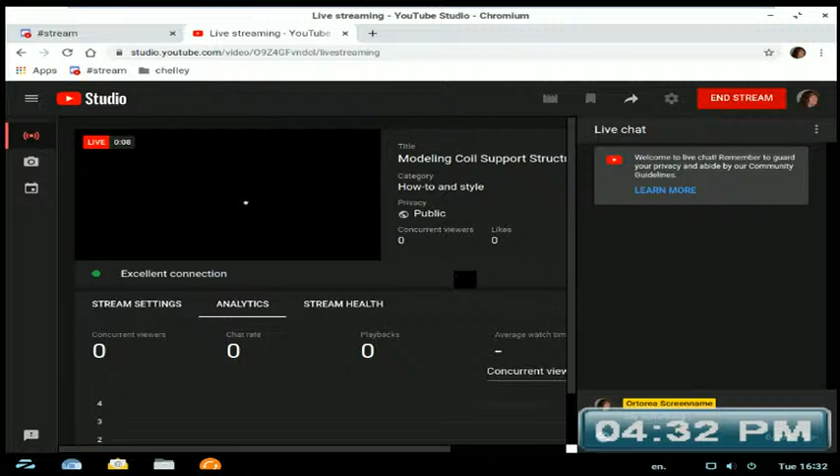Right, back again. I think I'll pause the virtual machine as soon as I've got verification that it's running. Looks like it. Right. Just need to get it started on this.

So, what am I doing today? Right, well, obviously because of the new three-legged design.

Oh, that sounds funny. I don't know, I keep on unintentionally using puns. Yeah. I don't know why, I just do it.

Right, because of the new three-legged design, I have to adjust my coil support, so I'm kind of using the previous title for the same thing, because what I need to do is make a new coil support that's actually wider. So the best way to do that, I suppose, is to start from scratch, really. So what I'm going to do is I just want to create a disc first of all. I'll show you what I mean.

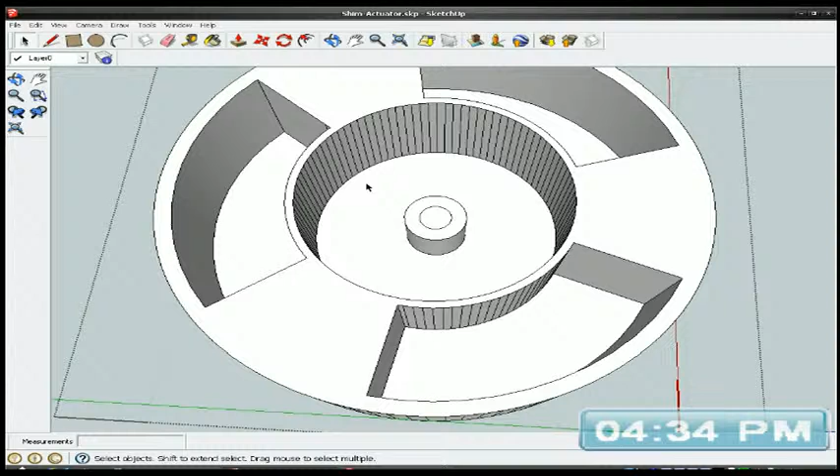The easiest way to do it is to go to my drum. I've still got the hole bunged up in it. Oh dear, I'm doing it again. Right, so I need to close this. Oh god, I'm not going to say anything. I keep putting my foot in it. Right, so we'll just seal that up. Right, I'm avoiding the pun. So that I can get my centre, because this is the easiest way of doing it, really. Just to model around this drum, and then I'll show you in a minute anyway.

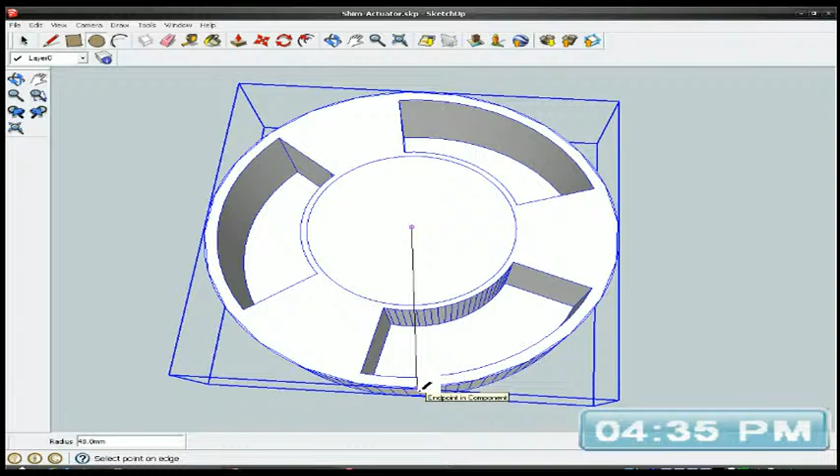Right, I've closed the group so that I'm not going to mess with that. I need a new disc. I want the centre. Oh, there we go. I've got my centre. So I'm going to make a new disc. I want to check the diameter, which is 48.8 millimeters, and I want a 2mm gap actually. So 48.8, so I'm going to go up to 50.8. Because I want a bit more room, because I'll leave it on that edge and I'll take 50.8. Right, so I've got a disc all the way around that.

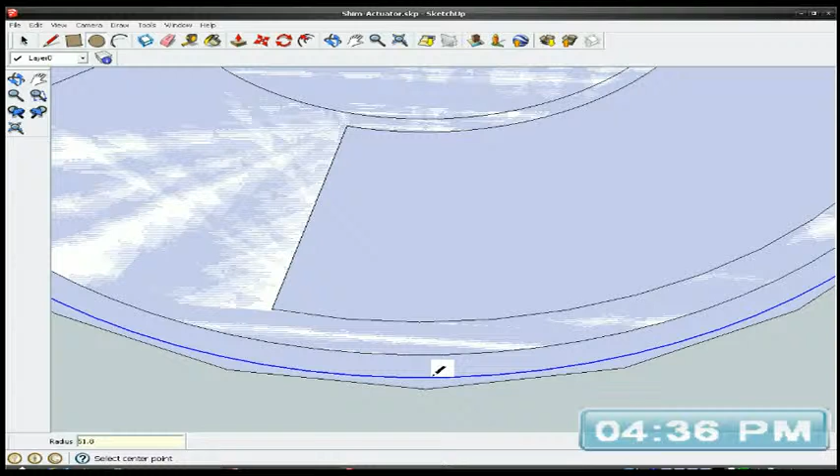Now I've got to stall these edges and smooth them out, because they've stepped pretty coarse, so I'm going to just divide that by 100. Right. And I also need another disc around the disc, because I need a wall going down, I'll show you what I mean in a minute. So what I'm going to do now is go back to the centre again. Going to go out, so that's now 50.8, and I want a wall thickness of 1 millimeter, so 51.8 should do it. Let's just go to 51.8. Right, now I need to smooth that edge out. Divide by 100.

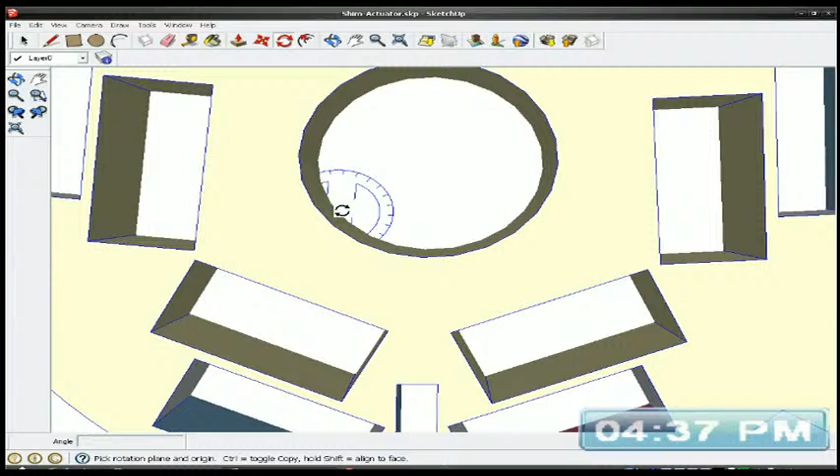Now I have to put a division in this. So actually, is this showing up in the other models? No, it's not, because it's not inside the component. So no worries. I need to go across here and I need to measure between. I'm not going to say it. Oh, best thing to do is, I've got my centre on here because I sealed the drum. So I'm going to find the axis between these leg points. So if I can find the flipping middle, which is a bit tricky. Oh dear me, come on. It won't let me get the middle. I think I need to go between there. Try it this way. Oh, that's not the middle. It says centre in group, but that's not the centre.

Bugger it, I'm just going to hide this top thing. Hang on a minute. Edit group. Let's just hide that. Right, that's better. I can see what I'm doing now. Right, I want to get the middle. I think I've got it now. Got the centre in group. Can I unhide that other thing? Unhide. Can I still get the centre? Yeah, I've got my centre.

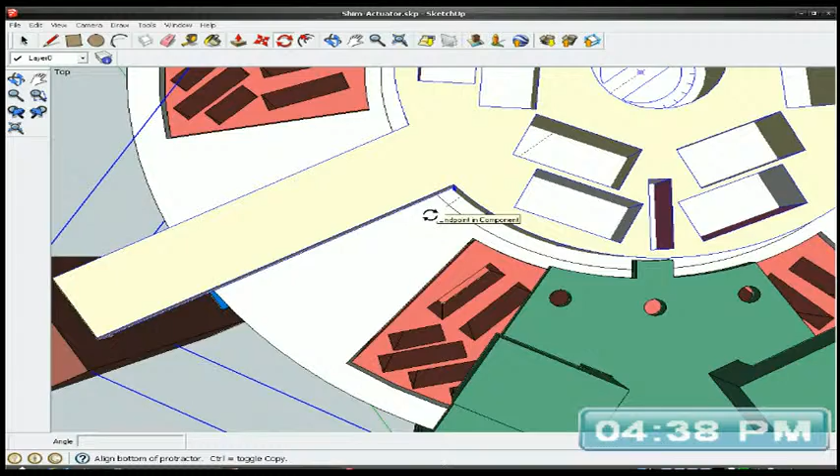So what I want to do is, when I find the axis, these legs are not perfect. So I'm going to go between the... come on. Oh, it's not telling me. It's because I'm not rotating anything, that's why. Right, so what do I need to do? I'll just have to rotate this whole drum. That's what I'm going to have to do. Edit component. Now let's try rotating that to work this out. I've lost my middle now. Lost my friggin' centre again.

Not good. And I can't hide that thing because I'm inside another group now. I'm just trying to find the...

Hang on a minute, I just realised something. What am I doing? I know what the division is. It's 120 degrees.

Hang on, 360 divided by 3. Let me just... I'm going to need to go a bit under that though. 360 divided by 3 is 120. Right, so actually I need to be less than that. So I'm just going to get out of this lot because of 120. Let's try this.

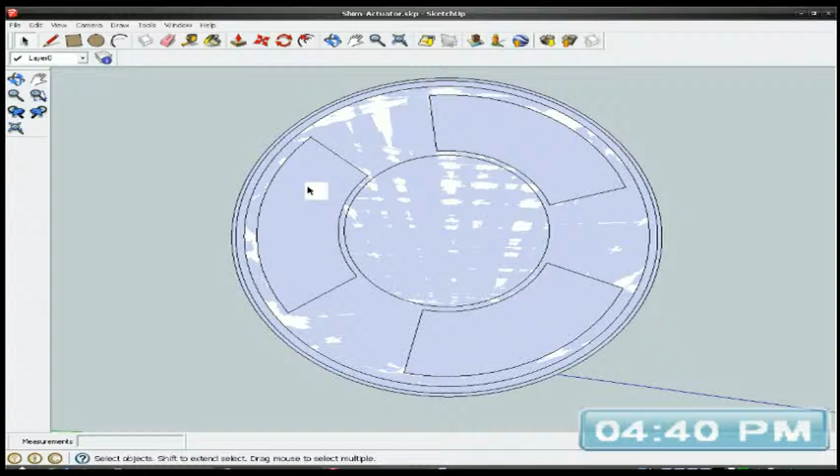Right, if I can get my ruler, find the middle of this thing. Can't. I want that.

I'm going to make a new group. I lost it again. It's like, connected. Make group. Right, I'm going to hide this other thing. Hide. Right, that's better, then I won't get in the way.

Damn it! Now I want to use the frigging loo. That was sudden. Be back in a minute.

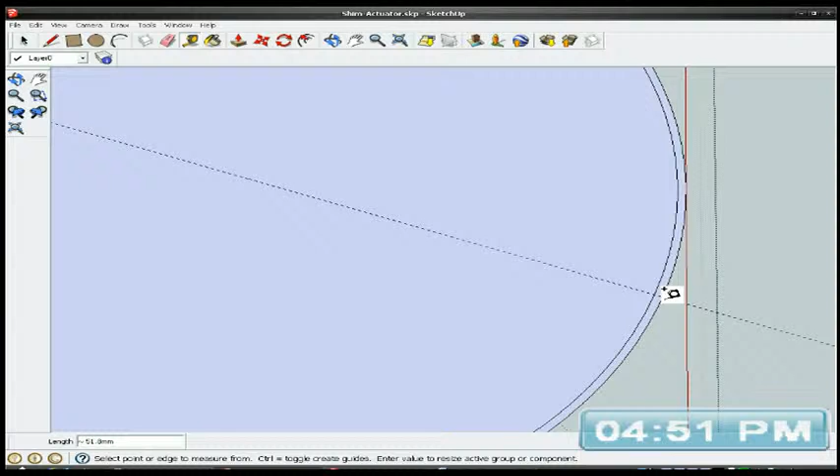I want the middle again. I want 120 degrees. So what I'm going to do is I'm going to draw—actually it'd be better if I just undo the guide and just draw a line from the middle to, I'll stay on the axis, the red axis. Go all the way down here.

Right. Copy that line. Like that one. Oops, wrong one, don't want all of it. Just that one.

Rotate tool. I want the middle, and I want to copy that line 120 degrees. Actually, I'm going to go a bit less than that, I'll show you why in a minute. 115 degrees. So plus.

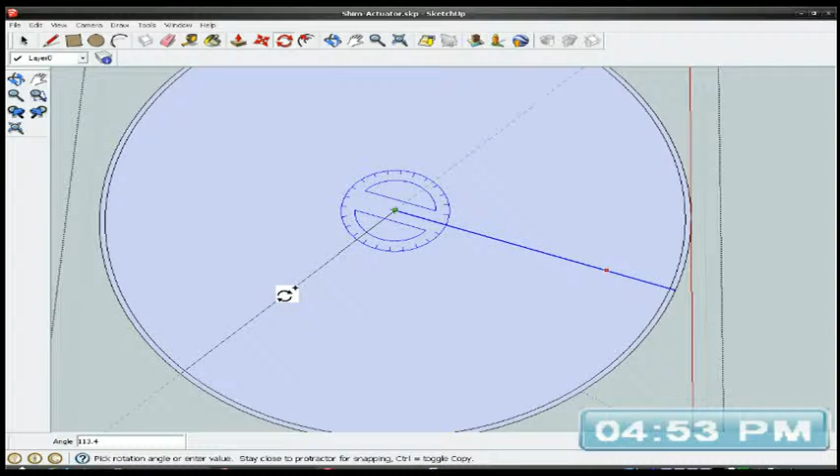I'm just going to go to... I'm going to go to 112, 112. So I've got a line like that. So it looks like a pie chart now. Right.

Alright, let's just close this out a minute because I want to get this axis right. So I just want this. I'm going to copy that. I'm going to make a component. I'll show you why in a minute. So I'm going to copy that.

Because I need to... let me just go to this other one which I haven't hidden, which is still visible, because I need to get rid of that hole a minute, which I don't need anymore, because the other one's hidden, you see. Right, I'll get rid of that as well. Right, I won't need that anymore, because I'll show you why.

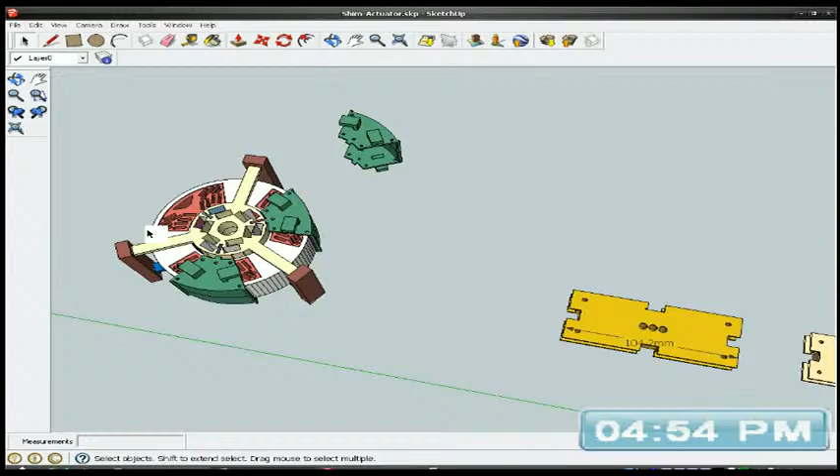I want to put it on top of here. Or better still, I want to copy that one over here, which is a lot better because I've got the thingy-jigs. I'm just going to paste the copy there. I want to—it's in a group, so I can move it around.

Just a minute, it's a bit low right now. I need to lift it up a bit. I'm just trying to get my alignment right.

Right, the other line's underneath, so I need to rotate this thing around now. This is my guide, and I've got one that's free to work on, and this one which will give me an idea.

It's a bit of a pain, but my centre should be around that axis, so I'm just going to rotate this around a bit. You can see the problem there. I didn't get enough clearance from them legs.

So the line is underneath them legs, so that means I need to move them lines. Actually, it's better if I just... right, let's just look underneath. It's because them legs are square and they're not tapered. That's the problem. Just gonna have a look underneath.

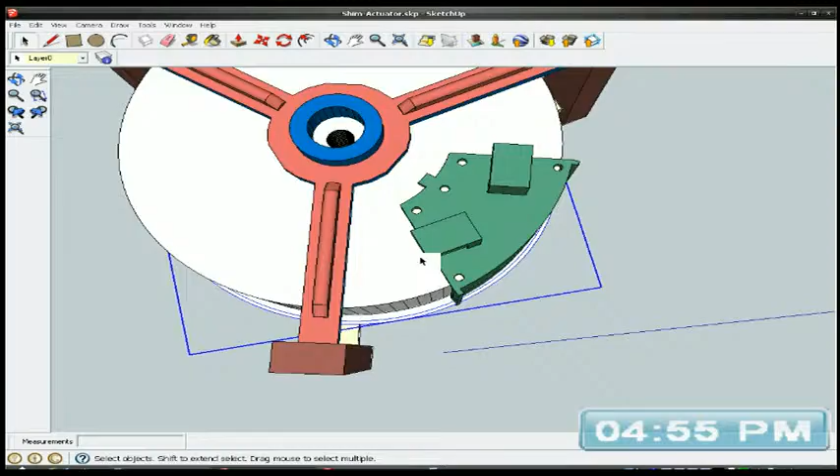See if I'm in the middle. Looks like I'm in the middle. I don't have to be bang on right now, I just want to be in the middle-ish. So really...

Right, so yeah, them lines need to be in more in the middle. So what I'm going to do, instead of messing around with this one, which is hard to get to, I'm going to measure something. I'm going to take a measurement.

Right, that line underneath this here is about right, but it wants to be back a bit. Let's have a look at this one over here. It's a bit too far underneath. I'm going to rotate that a bit more.

What the hell? Somebody's pipping the horn. What the hell is all that about? Somebody's a bit horn happy.

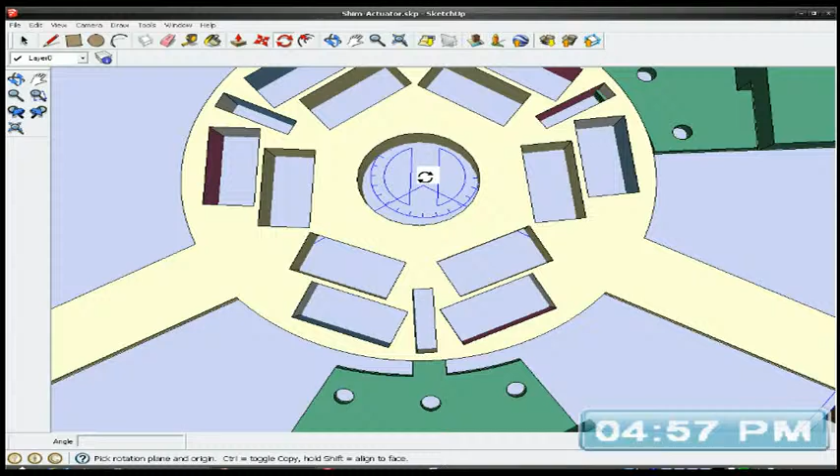Right, I need to bring that around a bit more. I'm going to go on X-ray in a minute. Let's put that up there.

Yeah, that's not far off. A bit further back. Just want to get them lines about right, the same.

What the hell? I'm going to look outside.

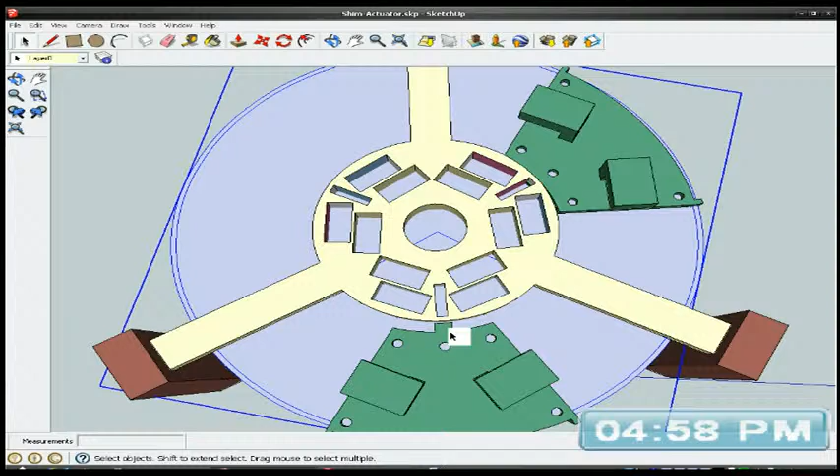Shut up, for God's sake. Someone's pipping their horn. I think some kid's got behind the wheel somewhere. For f*** sake, shut up! I hate it when people start pipping horns. Unless it's a dog.

Right, so what I need to do is bring that line in on this side. Just trying to measure it. It's a bit difficult to work out - about 2 millimeters. And on that side, I know I'm doing this in a really peculiar way, some people do it differently, I know, by about 2.4 millimeters.

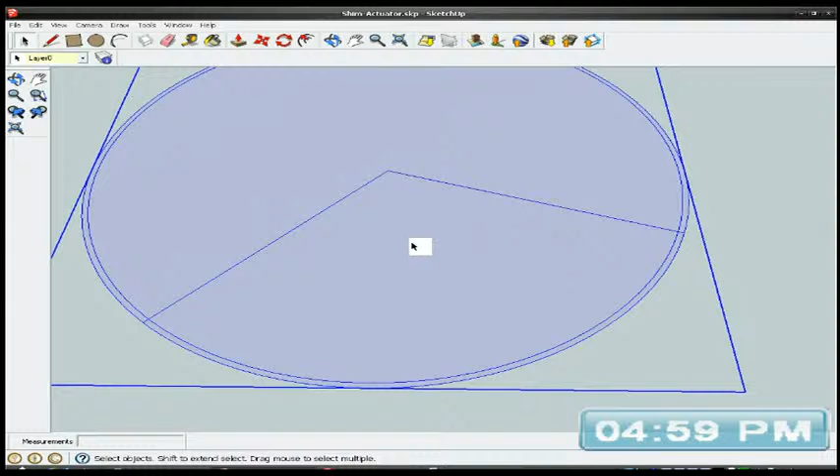Right, let's go over to the disc. Actually, I've forgotten how far from the centre I am. I need to measure the distance from the centre - about 24 millimeters, doesn't have to be exact. Right, go over here. 24. I've got a dot there now. 24.

And remember, it's 2 millimeters in. I just want the dot, I don't want the flipping line. Oh, it won't do that. Go from here - 2 millimeters. Well, it looks like I've got it - it says midpoint anyway.

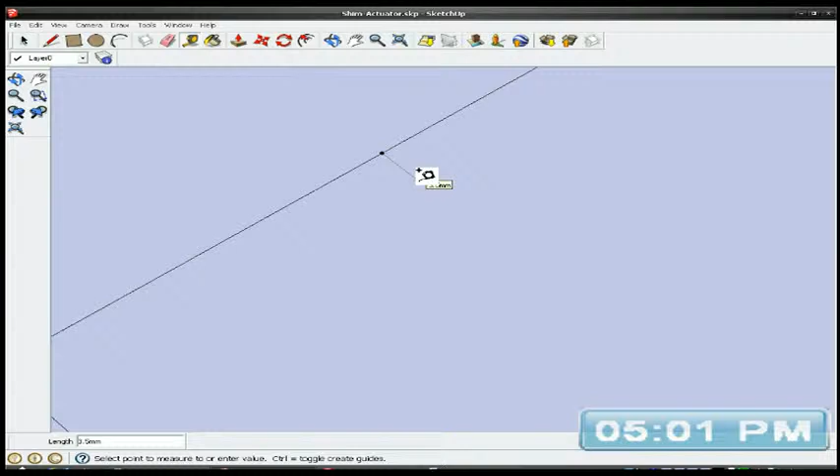I'll go over here, I want to be 2.4 millimeters from there. Oh, is it 2.6? Oh, we'll go to 2.6, a bit extra is fine. 2.6, come on, you go there. 2.6.

Because it's a component, my dots should appear over here as well. Yeah, I can see my dots, my ruler marks are here. Right, it's on that line, around that edge - right on the edge of this side of this bracket.

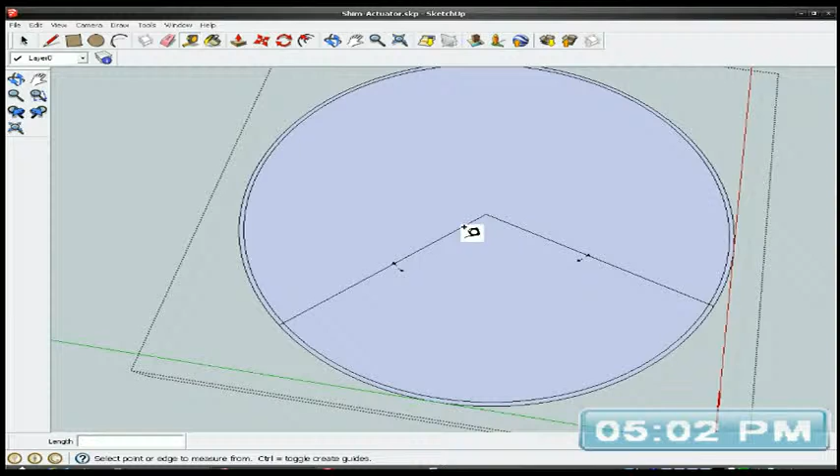This one's just a bit of a pain. So what I'm going to do now is I need to get my arc tool out because I want to cut an arc on here, so I need to measure between there and there, which is 24 millimeters, right, 24 millimeters, near enough. So, sorry if I'm making you drunk by doing all this - 24 millimeters in a straight line, just roughly.

There we are, so now I need to put an arc between there and that point and take the arc up to that dot. There we go, I've got an arc. Now this is going to form the inside of my coil former thingy-majiggy.

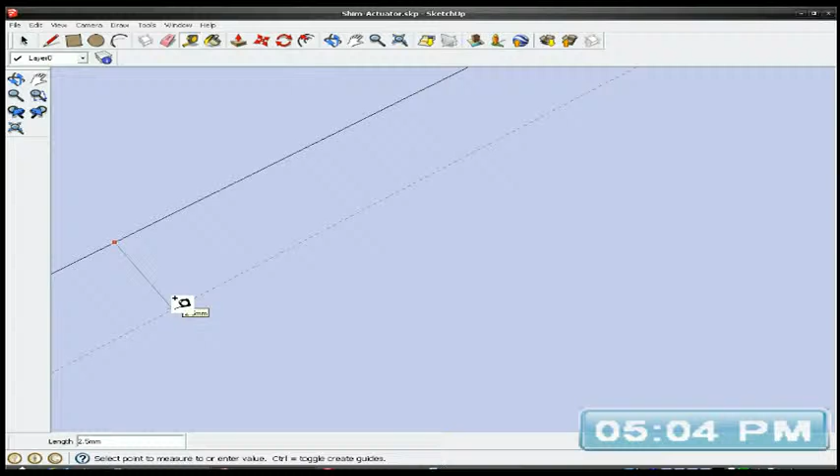I want to be 2.6 millimeters from over here, but I can't seem to get a line to a dot. Oh, there we go, I've got it now. Right, 2.6. What the hell? Come on. Jump in between 2.7 and 2.6. Right there. There, 2.6 there.

Oh, I forgot where this is done. So I'm going to draw a line between there, that dot. Oh shit, I forgot how far. Hang on, escape a minute. Oh, actually I can go right to the edge, yeah, that's right. So, a line between there and there - a line between there. This is probably going to make it wrong, so I'm just going to undo it if I need to.

Right, let's have a look at this little one over here. Yeah, yeah, there's a problem. I'm going to rotate that a bit. I am going to - what the hell? Oh, I know what I've done wrong. Oops, I just realised what I've done wrong.

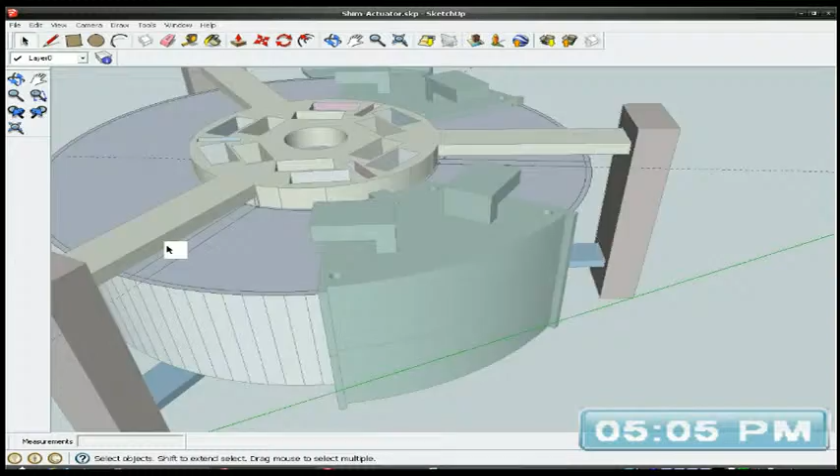Right. Oh, undo that, undo that. I'm not thinking today, my brain's not working. I want to go to that section like that, from that dot to there. Now that should look right now.

Come have a look over here. Huh? What? No? Oh, it's not far off, it's just a bit off. I should be in between - I need to be in between them lines. I'm terrible at flipping - I'm not very good when it comes to angles, that's my biggest problem.

Right, I know what I need to do. I want the midpoint, so undo. I want to be between there and the midpoint over here. That's there. Oh, this one doesn't have a midpoint.

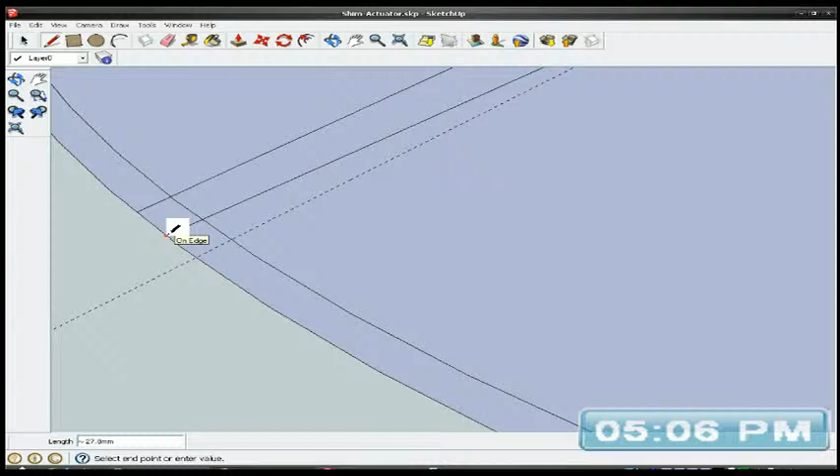Oh, it's wrong, oh, I'll go about there. Right, have a look. Come on, not far off. I'm gonna try and move that line a bit. What about the other side? Yeah, that one's moving a bit more.

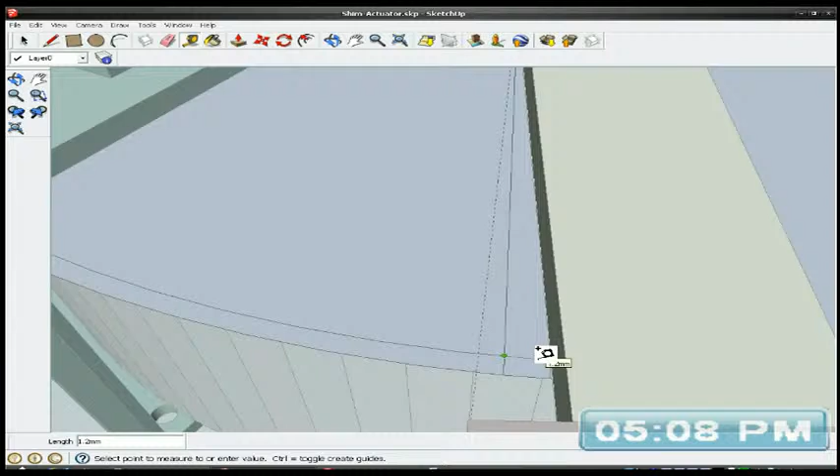I want to be in by 1.7 millimeters. Well, actually, 1.2 millimeters if you're further in. Oh, well, I want to be right there. It was in betweeny, I think this one wants to be - I'm going to guess that it's about there. Right, I'm just going to delete that other line.

I'm not all with it today, you know, I really aren't. I've just had a strange kind of day.

Do I need to be right to the edge? Probably. I'm just going to go directly across here because I don't want that other line to go that way.

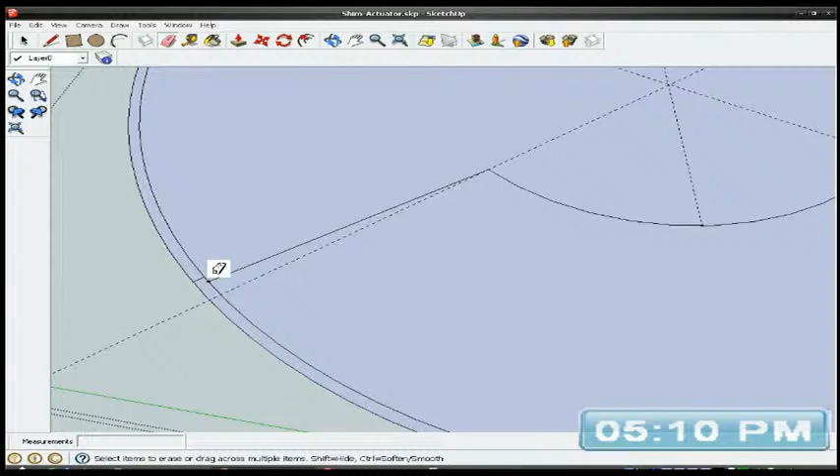I want to go straight across. Come on, stop it, damn thing, it keeps jumping to the axis line. I don't want to be over there, I want to be over here. Stop it. You hate it when things won't go where you want them to go. Right, got it.

Yeah, that's about right. Same on both sides. Get rid of that line. Once you've got the top one done, that's great because I can copy it, duplicate it. I'm going to delete all my guidelines. Delete guides.

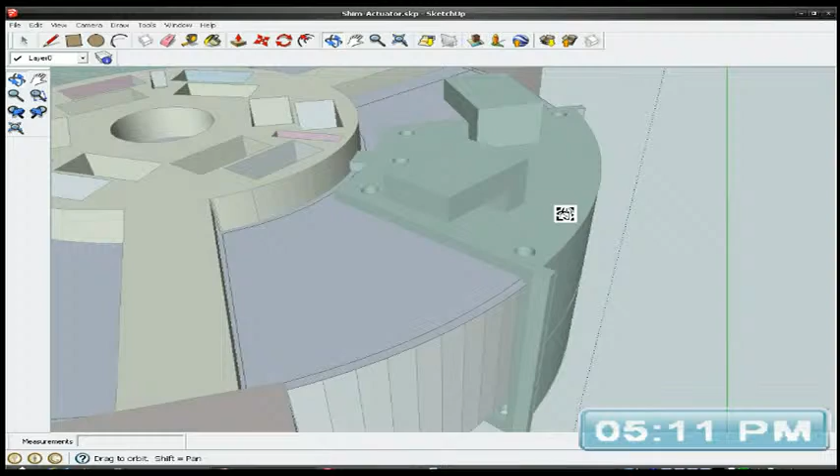Let's have a look over here. Yeah, that's not bad. Yeah, that's good enough for what I want.

I haven't got clearance on the arc very much, so I'm just going to redo the arc line a bit. That arc wants to be starting about here to there. Come back a bit more.

Get rid of that one. This is just a shelf really, I'm not fussy about it. It doesn't have to be precision, that's why I'm just doing it this way. Yeah, it looks better.

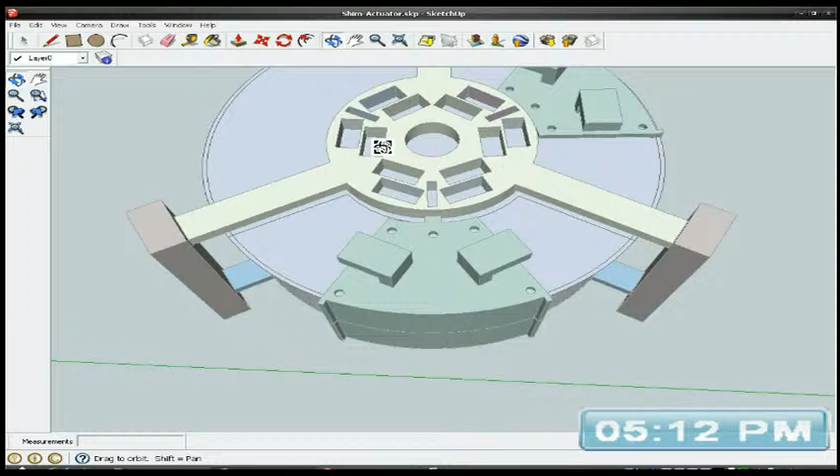Right. Go back over here. Now I can delete all of the other stuff. Go down here.

Select all, delete that, select all, connected, delete that. Oh damn it, I'll just get rid of it.

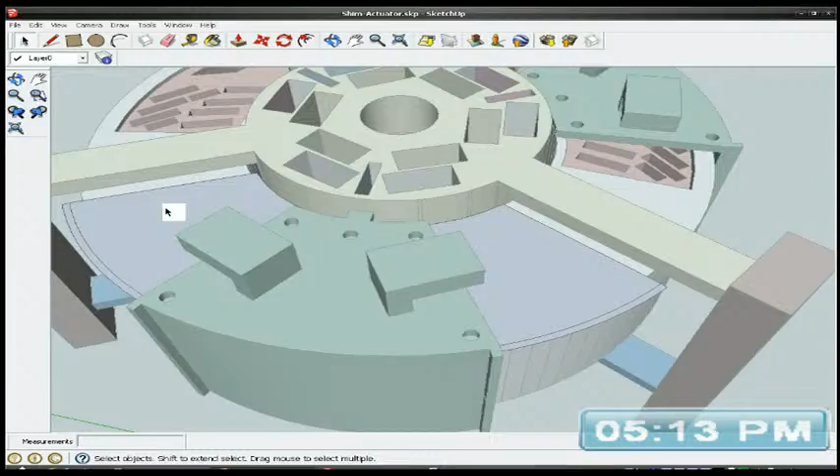Okay. We'll look over here, starting to get my shelf formed.

Right, these green ones want to disappear, but I'm going to leave them for now. Actually, I can delete. Let me just go out of that other one. Just delete this one. Edit group. That one can get deleted.

I've got one over there to copy my reference files and everything. Right, go back over here. Right, I need to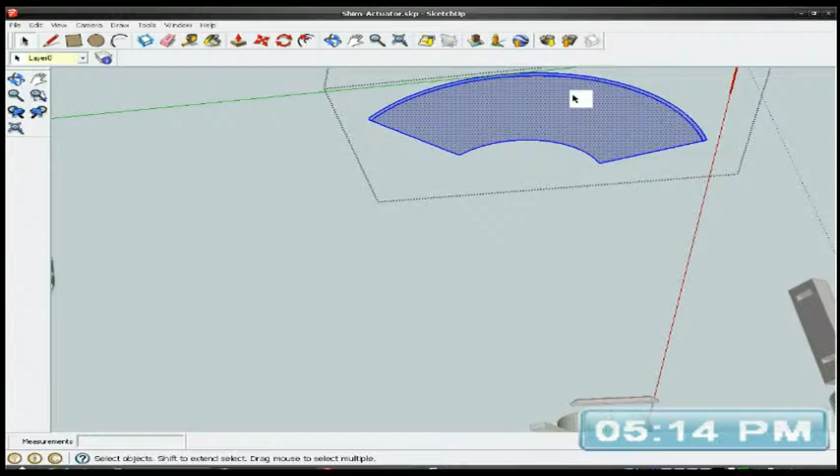reverse faces because I want to—oops—I want this to be, actually I'm going to pull it up because it's, let's lift that up by, let's see

1.2 millimeters. I'm going to have a big hole in the bottom of this. Yeah, no worries, I'll sort that in a minute. Bring that up to there.

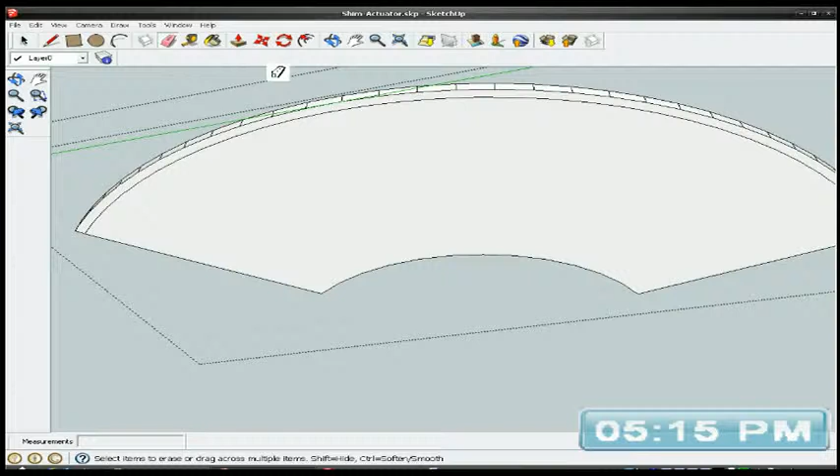I'm going to go underneath, I just want this hole filling in. There we go. Now I want to come down. Oh, let's just measure the other shell now, I'll know how much by then.

Halfway point would be in the wrong place, I want to be on that corner. 15.5mm. I want to come down.

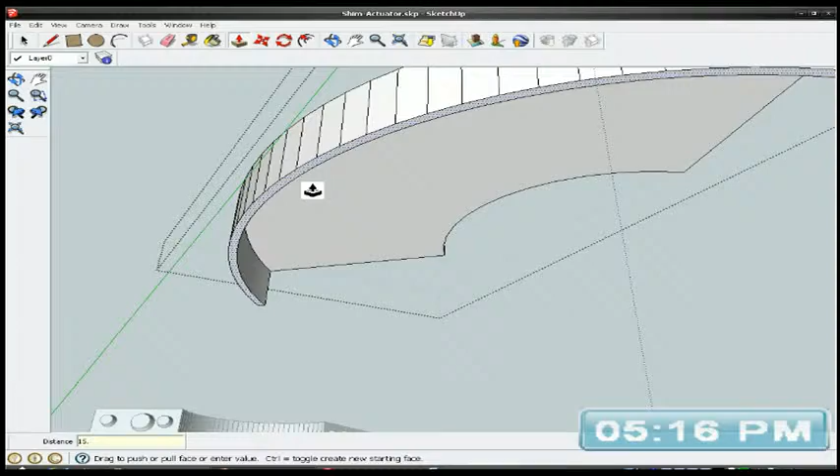15.5. Right. Get rid of that inside line, don't want that line there anymore.

Let's have a look. X-ray. Oh, I've got these friggin' lines again. A minute.

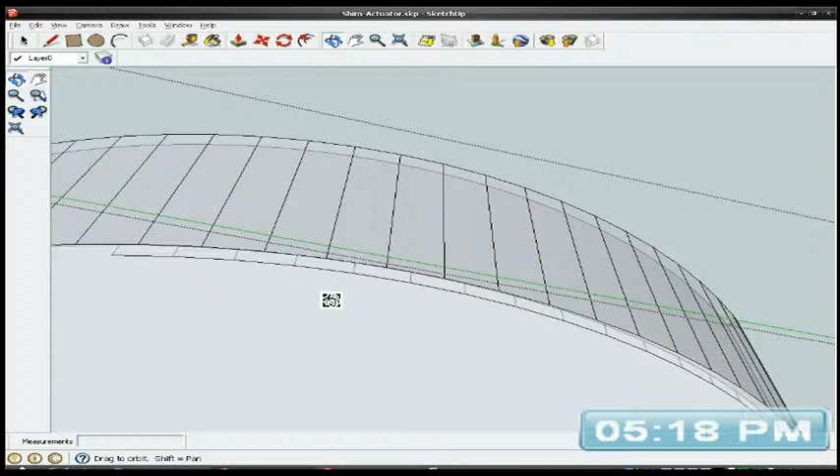Won't take me long to get rid of this lot. Just have to check, make sure I haven't deleted anything I shouldn't have done.

Right. Okay, getting there. Right, close component. Oh, actually I need to keep it open because

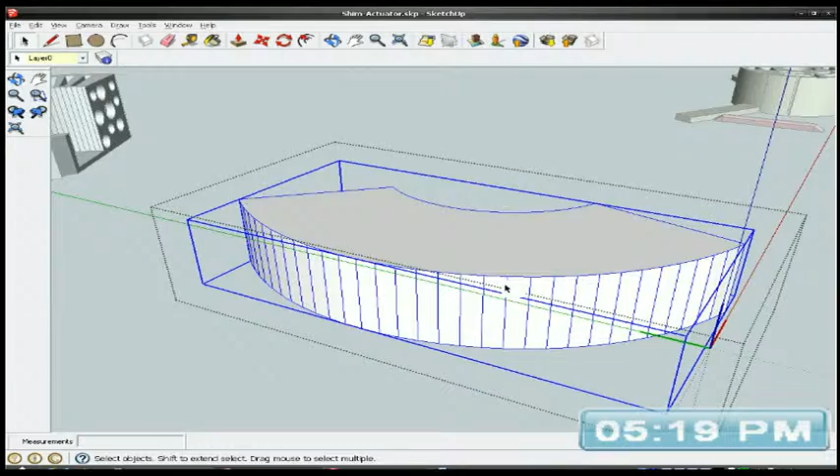I'll show you why. Right, select all. Oh, I mean I've closed it already, damn it. Right, edit component, select all, make a group inside the component because I want to duplicate that.

Plus, holding the control key down after you flip that on the flip along blue axis so it's upside down. Now I'm going to bring that up by 3.6mm.

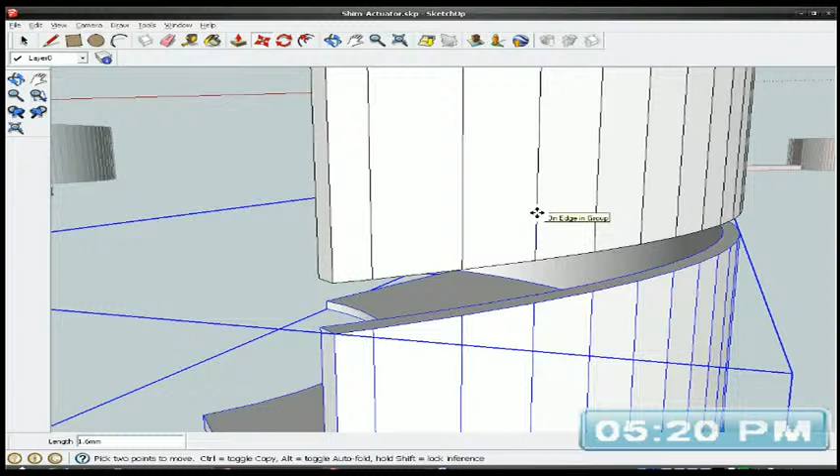I'm going to be printing these in separate pieces and then I can, right, 3.6, I'm going to type it, 3.6, right, they meet up in the middle.

Now I want to explode, I'm not going to explode the component, what's that? So I should have exactly the same thing over here now. Yeah, we have exactly the same thing over here, but the clearance is too tight right now.

You see the gap is too tight between the drum and the shell, so what I'm going to do is see how much clearance I've got on top. Oops, just a minute, shift. I've got 1.1 millimeters I can go up, so

Come on you bugger. Edit component, edit group, extrude the top by 1.1.

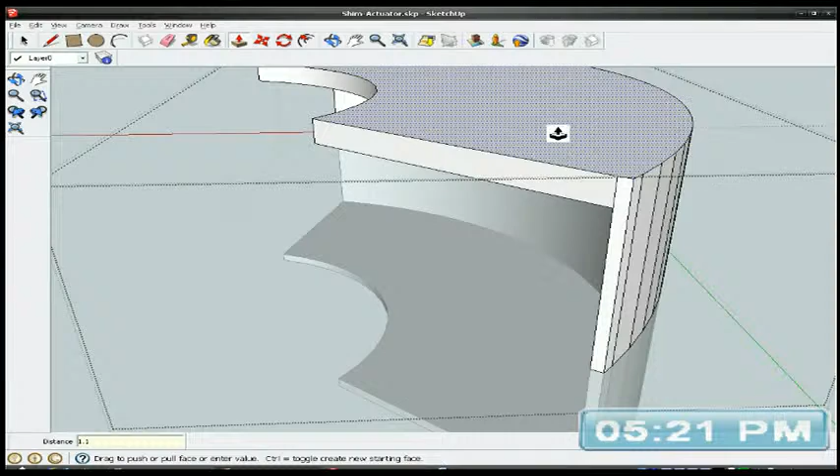And take this up 1.1. I don't know if you change the bottom, I'll find out by colouring it in. Hang on, tools, paint bucket.

I'm not sure because blue. No, it hasn't. So I have to do the bottom one as well. Right.

Close group. Edit group. I need the bottom to be different anyway because, well, I'll show you in a minute. 1.1.

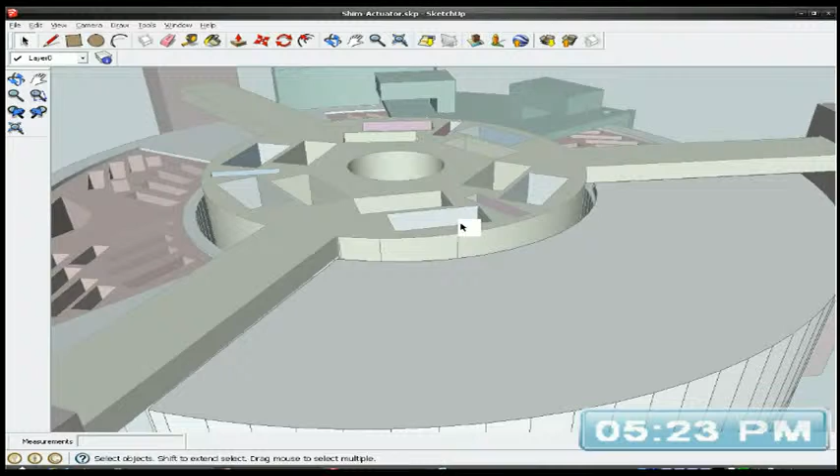So what I'm going to do is make another arc to bring that in closer, which I didn't do last time actually. I'm going to measure it here now. About 8.8, I think, 8 millimeters actually, 8 millimeters in. So if I close that other group I was in, you can see there's a big gap where you can see the rotor underneath. A lot more room to put my coils. I just have to punch some holes and tie wraps, and I'll put brackets on and something like that.

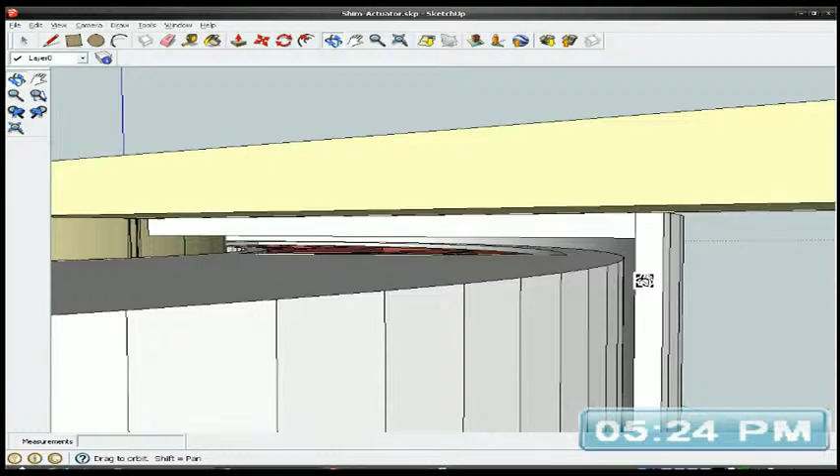We've got clearance now. Let's have a look. We've got more clearance now. Shift key down. 1.5 millimeters clearance, which is better than before because I think last time we only had 1 millimeter clearance, and I was having some issues with catching on it, and it warped a bit on me.

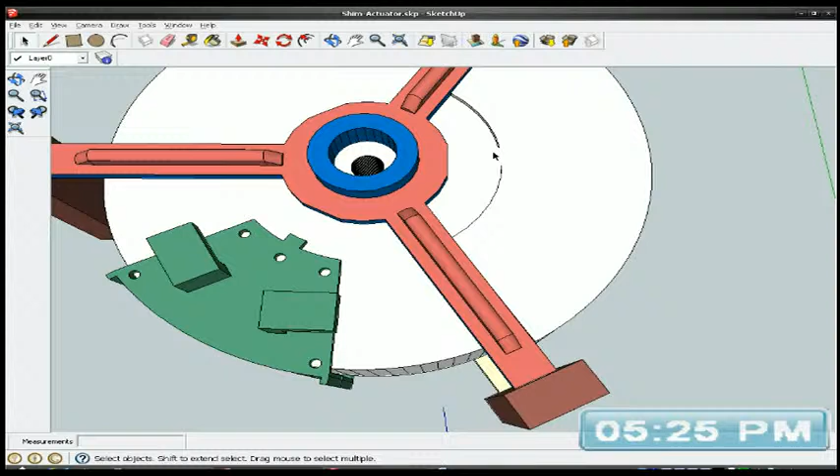So the other one I need... oh dear me, I forgot now. I'm confused now. Hang on. Right, I need to go in 8 millimeters along that line. What I'm going to do is just modify it directly on here because I use that as a guide. So I'm just going to edit this component, edit group, because it's easier to see what I'm doing.

So if I create a line right on the corner and I follow that line along the edge and press shift down, it will lock it onto that axis. Then all I have to do is pull it the other way. Oh come on, I want to go this way. Go by 8mm. Right, I've got a line going 8mm in, look. Can you see that line? Very tiny. I'm going to go on the other side.

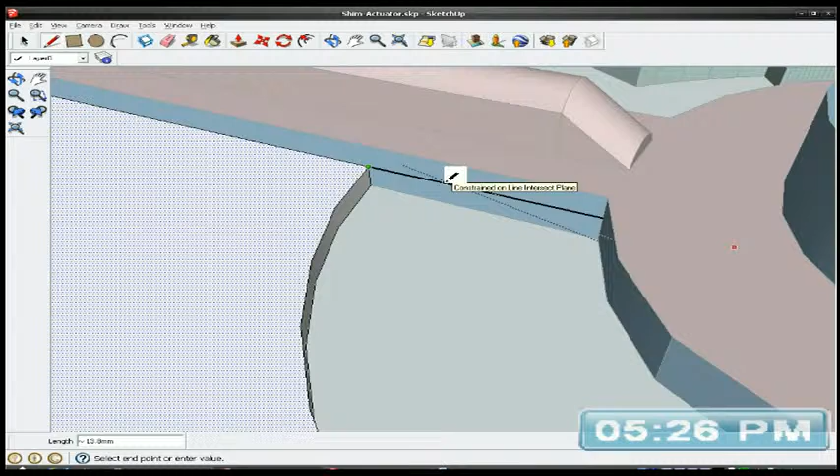I'm going to go on the edge, follow that edge, push shift down, go in. It's doing the same thing on this side as well, it's just being such a pig. Hang on, I'm going to have to rotate slightly, follow that line, shift down. I want it 8mm long. It's gone all the way, I don't know where it's gone. Take my shift key off a minute. It's not letting me do it. Follow this line. Come on, 8mm, don't go wild.

There we go. Right. Doing it now. 8, I want 8. Stop jumping around on me. What's that? 8.8, I don't want that. I want 8. You've jumped to 5.9. I only moved you a tiny bit. I will follow this other line. It's been such a pig, this thing. 8.1. Come on. Yeah, 8. Right, I've got 8 now, I think. It's been such a pain. Let me just make sure it doesn't run wild on me.

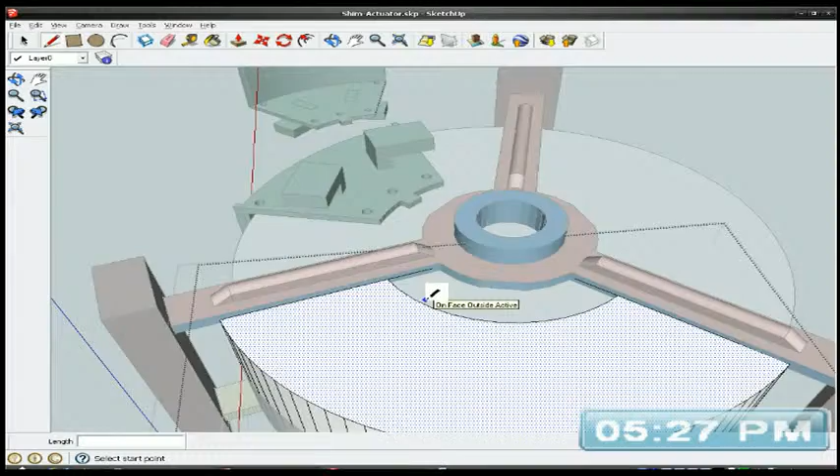Right, now if I measure a line from the middle, pull it down, and then get a shift lock. I want to go in, oh it won't shift lock on me. I want to be in by 8mm. What's it doing? What axis am I on? 8mm. There we go. Right, I've got a guideline in mid-air that's 8mm in from the middle. Oh, it's gone skew-whiff on me. I'm going to have to do one from here as well. It's on the blue axis. Not the blue axis, you silly thing.

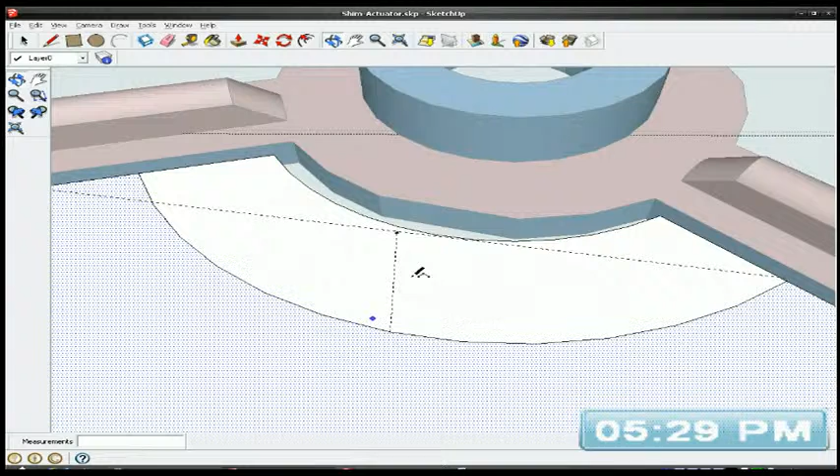Hang on. Press escape. Let's go in from... put shift down. Just go to 8mm. 8. That'll have to do. Now I want my arc to go between that line, the end of this one, on that line, and come up to this line. There we go, I filled in that gap. Finally! Delete guides.

Now I'm going to go over to the other one across the room. It's easy to do. Where is it? There it is. That's the bit that wanted filling in. Now I've got to extrude the inside of that. Edit component, edit group, extrude up to that face. There we go, I've got my missing piece now. Delete that bit, don't want it. So I deleted it, it didn't destroy everything. Right, delete that. Saved me a whole bunch of having to do this all over again.

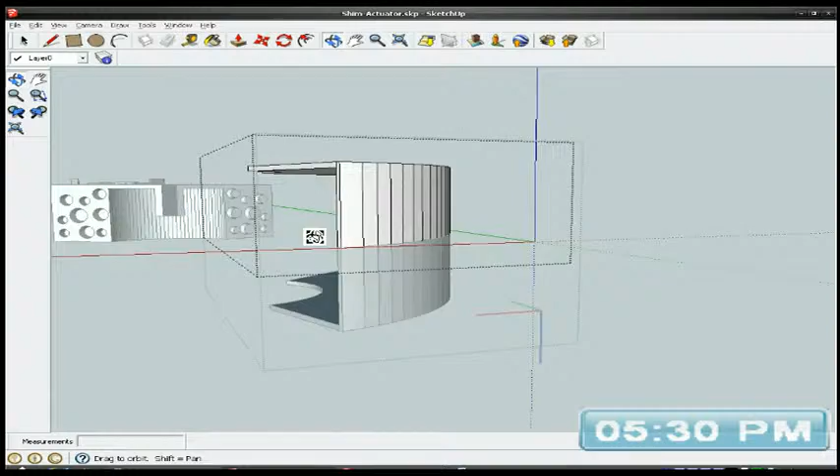So I've got the bottom and the top, and you can see it's different. Right, I'm done except for the brackets, which I've got to do. I know I'm upside down at the moment, so I need to rotate.

Right, so I've got my new canopy support coil thingamajig, but I need to strengthen this up because I don't want it to flop around on me. It's a lot bigger than the other one. I have made it thicker though. I think it'll be alright. Maybe I can get rid of them lines.

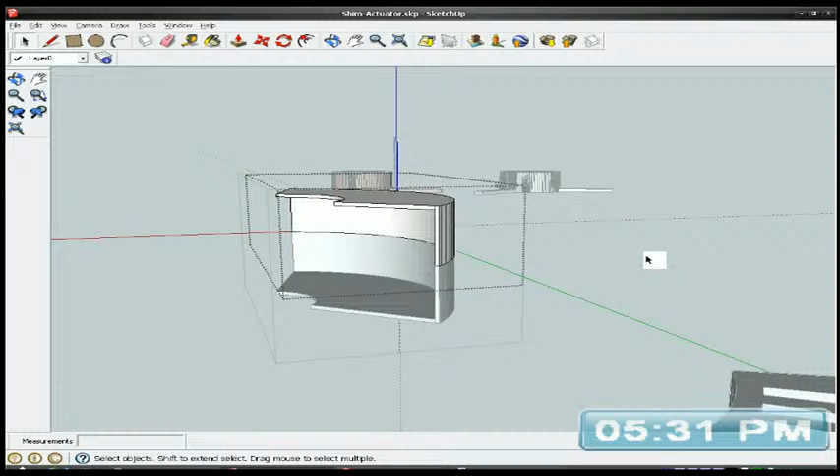Will it let me? Nope, I can't. Oh, I lost my pace. Yeah, it'll be alright. There's a slight angle on them. Right, so if we go back over here where I was, now the bottom, there we go, there's the bottom.

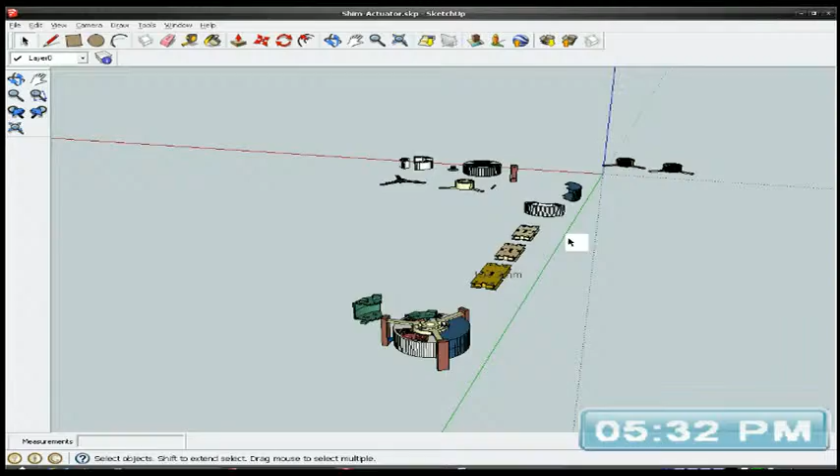I'm going to colour code that thing. Edit component, edit group, select all connected, paint bucket. I think I'll make it dark blue. I'll do the bottom section as well. Edit group, select all, connected, dark blue. Right, and there we go, it's done dark blue too.

Hang on a minute, have I got a plug in? No, I thought I had, but I haven't. I want to make sure there's a gap. It's sticking through that wall a bit. Right. Alright, so I've got to trim a bit off it. How much do I need to trim off? Shit. 0.1 of a millimetre, is that all? You're kidding me. 0.2 of a millimetre. Yeah, I'm gonna...

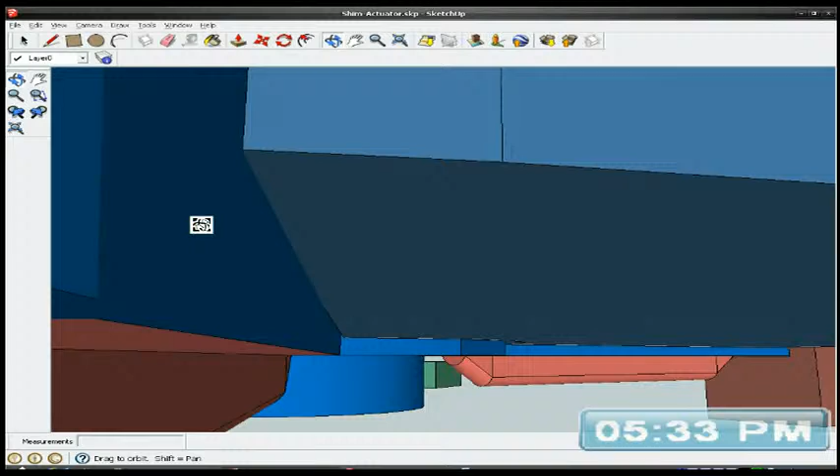Is that just the bottom? Oh, hang on. Oh, that's weird. The top's fine, not the bottom. That's odd. Let's check the other side. I've got clearance on the right side. Ah, right, okay, oops. I know what to do. I need to rotate this a little bit. I've filled my bloody hole in now.

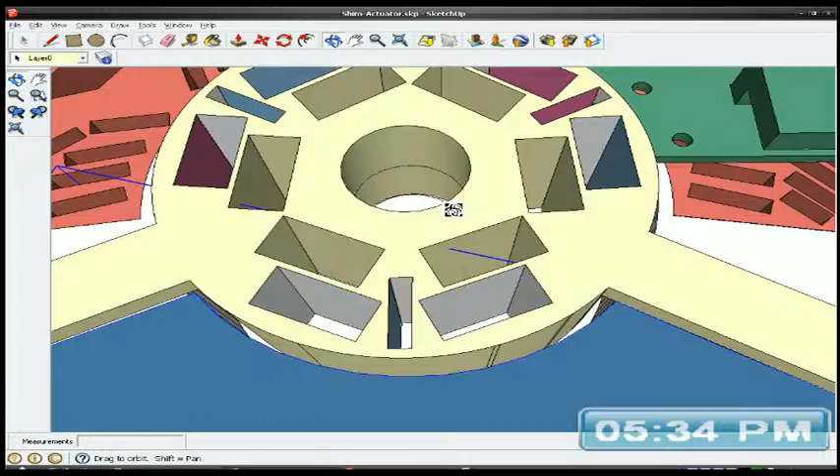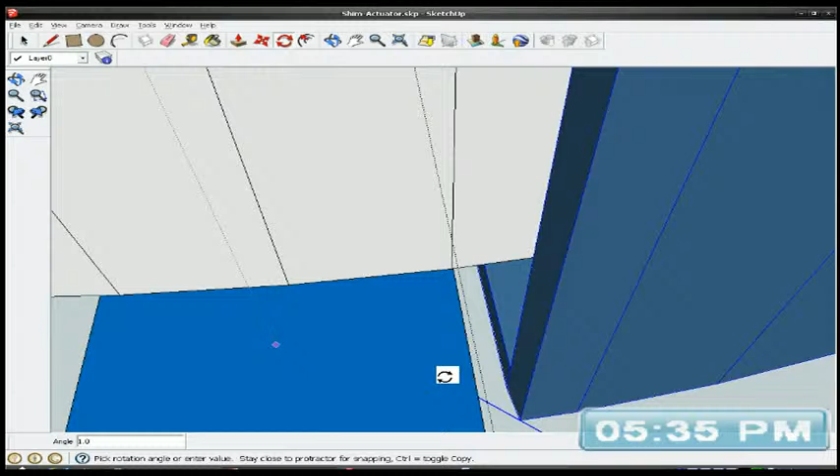Hang on. Edit group. Edit component. Edit group. Close group. Close group, close group. Right, maybe I can just move that a bit. I want the middle. That's near enough. Hang on. If I could just move this a bit, it should be clear. Ah! It's working backwards at the moment. Right.

It's easy enough to chop a piece off it if I need to do that. Yeah, that's going to fit. I mean, because I rotated it slightly around that axis, it's going to fit. I'll probably have to file it or something if it's too tight. I want it snug though. The reason for that is I want to be able to fix it in place so that it's not going to flop about.

I was going to say tight between the you-know-whats, but you know, I keep saying these strange words.

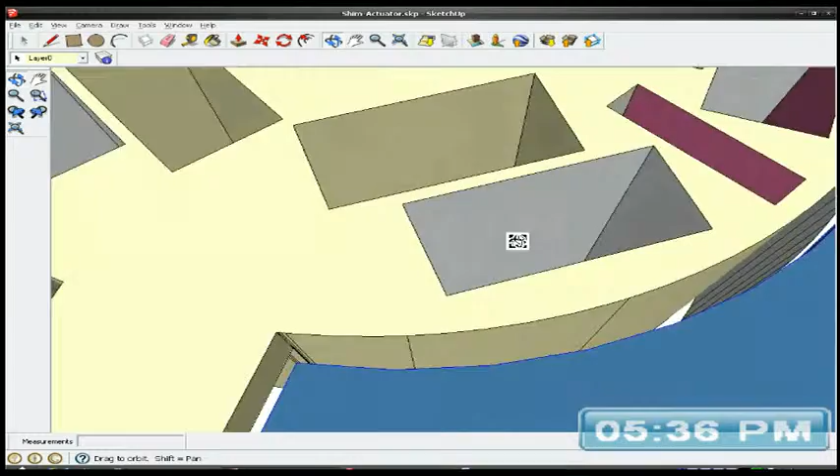I think I moved it too much, so I'm going to undo that. Undo rotate. Right, it's come back again now. I'm just going to move it a little, come on, there we go, right. I only want to move it a little bit, so if I just go to 0.01, I'll just go to 0.1. Right, 0.1. That should have fixed the problem at the bottom.

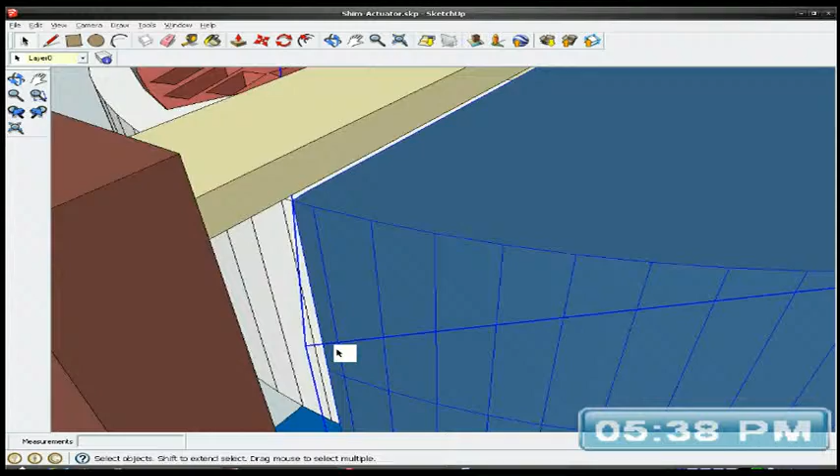I think it's still inside that wall. Just a bit. So I'm going to rotate it another point. I'm going to rotate it 0.2. 0.2. Let's have a look. Oops. I hate it when it does that. It's because I'm zooming into infinity or something. Yeah, that's cleared it. So we're clear on that side. Check this one.

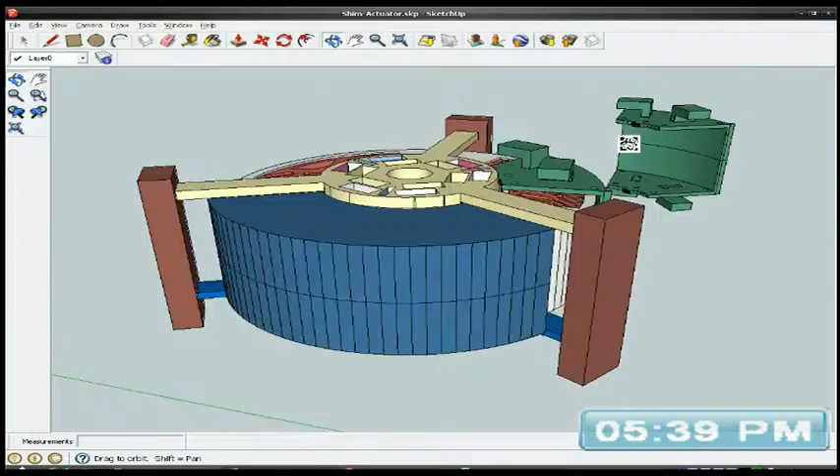Oh, it's a slight bit coming through that wall. Right down there. Just a touch. I think I can file that off. Oops, I've gone inside something now. Right, just clear this out again. Yeah. Now I've got one of these, if I 3D print 3 of them, I should be good. Actually, I've got to save this before I lose it all.

So if we go across here, edit component, my export. Support canopy. I'm gonna have to rename this because there's a top and a bottom now instead of just one. So I'm going to put U dash support canopy and export that one.

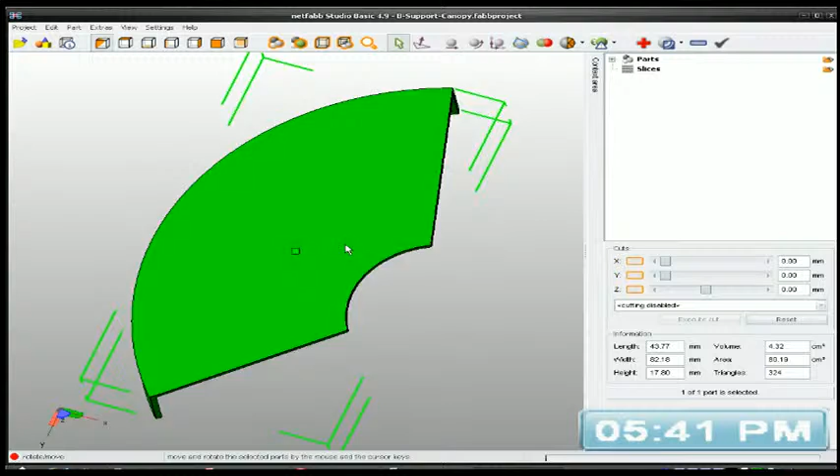Top. Yay, no errors. Good. Hate it when there's errors. So that's done. I have to double check, verify my thicknesses and everything, because if it's too thin it'll warp, so I'm just going to check, make sure. 1.2 millimeters. Should be alright. Let me just check, because I think the last ones that I did were about that. Well, the ones I was doing before were 1.6 millimeters. Alright, so I'm going to add 0.4 millimeters just to be on the safe side.

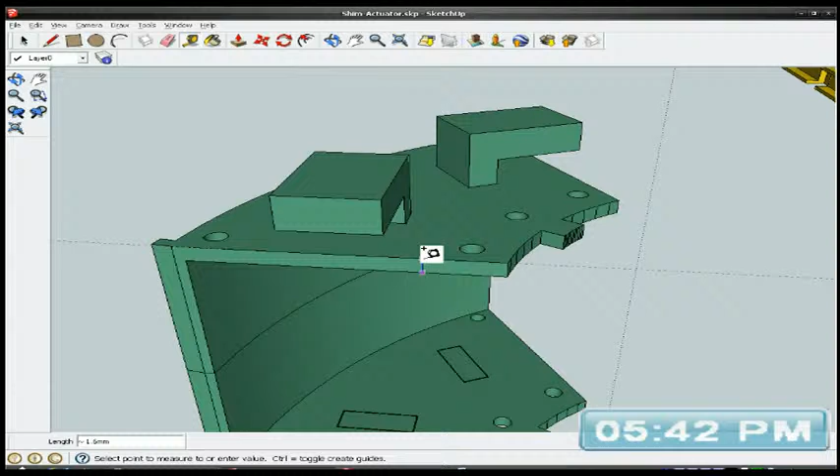I'm going to put the holes in them yet as well. So if I go back to this, edit group, it wants to be 1.6 millimeters thick, otherwise it will warp. 0.4. Bottom one, I don't know. Right, so there we go, that's my new canopy thingy-majiggy. Just make sure everything's fitting alright. Oh, I've got a little bit, it's overlapping my brackets a bit now.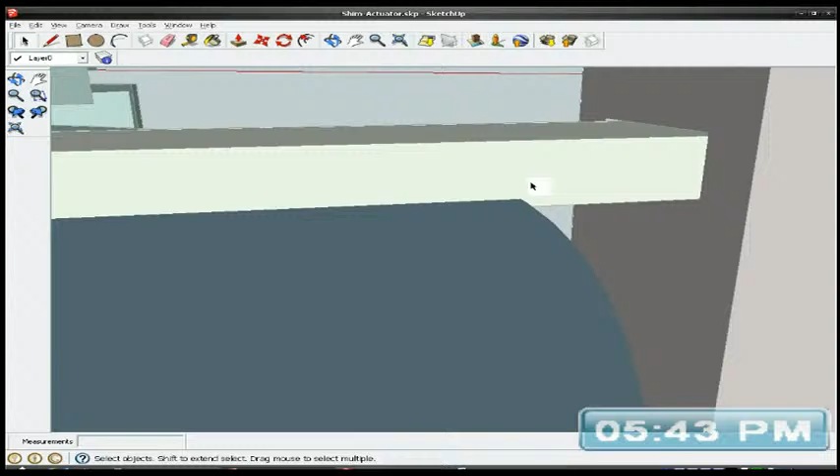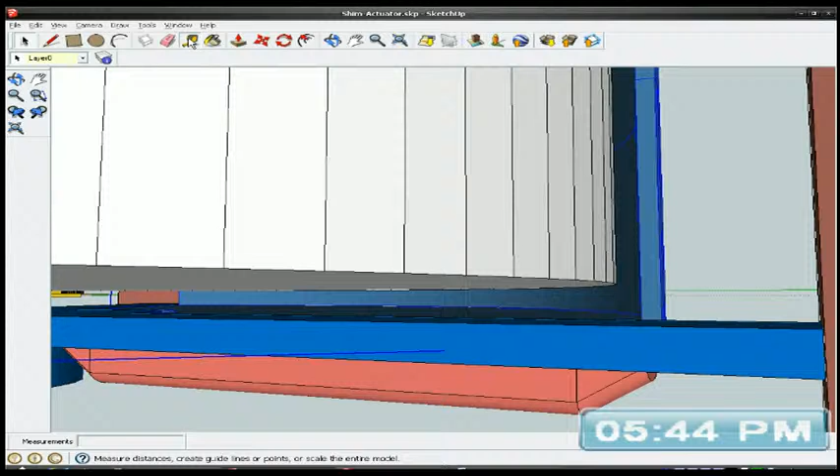Oops. Well, alright, so what I've got to do is make them a little bit. Let's check the bottom. How much clearance I've got down here? Oh, I see. I need to move them down a bit. Up a bit, I mean. Move it up. Right. I've got an idea. I'm going to have to adjust the height. Edit component. Now leave it, I'll just close it a minute. I just need to move it up. Let's check out the gap at the bottom. Shift key down. So there's 2.5 millimeters clearance at the bottom.

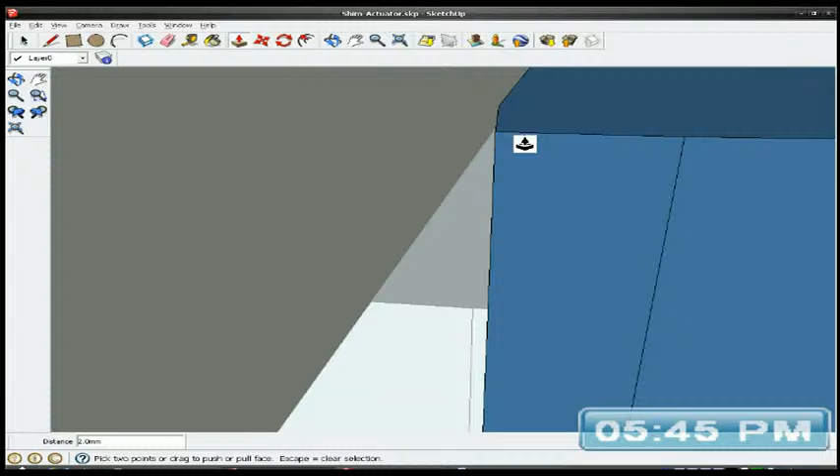Hang on. Shift. 1.5 at the top. So I need to move it up by 0.5 millimeters. So first of all, 0.5. Now I need to sort that blooming bracketing to fit this out. Oh, I know what to do. Right. Edit component. Edit group. Bring this down a bit. I'm just going to go right down to the top of this drum first. Then I'm going to lower this down to the bottom of this, put this on this face.

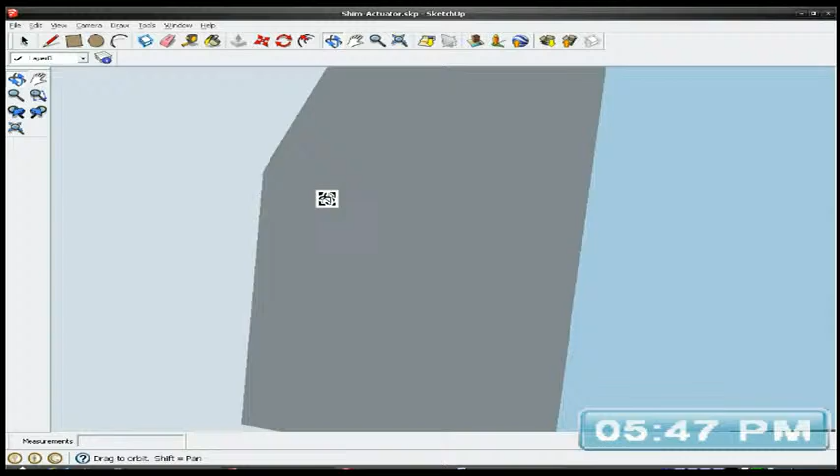Right, now we want it to 1.6. Go up to that line. Right, that's that. Sorted that one out. Check the bottom one. Close group, edit group. I'm going to go right up to the drum. Oops, where am I? Come up to that, inside that, on that face, right there. And I want 1.6mm clearance.

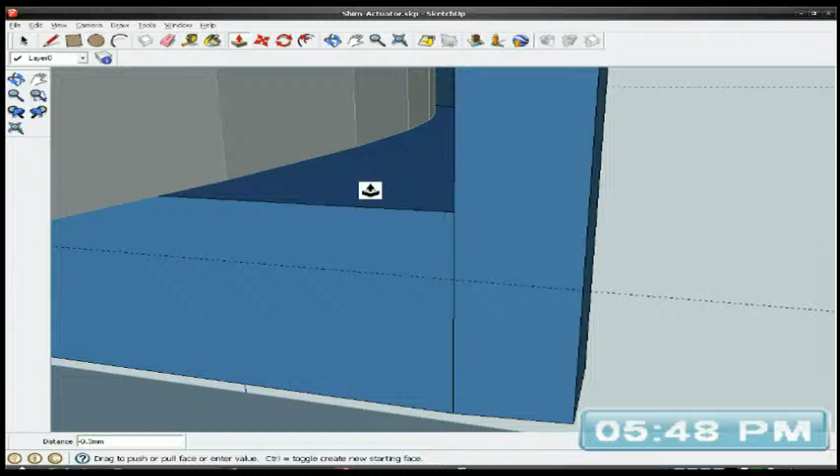That line. Oh, what the hell happened there? Oh, wrong end. Oops. Undo. I want to be down. Undo that line. I want to be from there. 1.6. I told you I'm not with it today. Online. Alright. Oops. Oh god. I keep going inside everything, I can't see a thing. Right, delete all the guides.

The reason for the small gap is because every millimetre makes a big difference on coupling with the cores that are rotating inside here. So the bigger the gap, the less power you get out. So I'm trying to keep it quite close tolerance. If it catches, it catches, and I'll have to sort that out. I'll have to figure that out and straighten things out or something. But I'm not going to make a great big massive gap for the sake of it. Yeah.

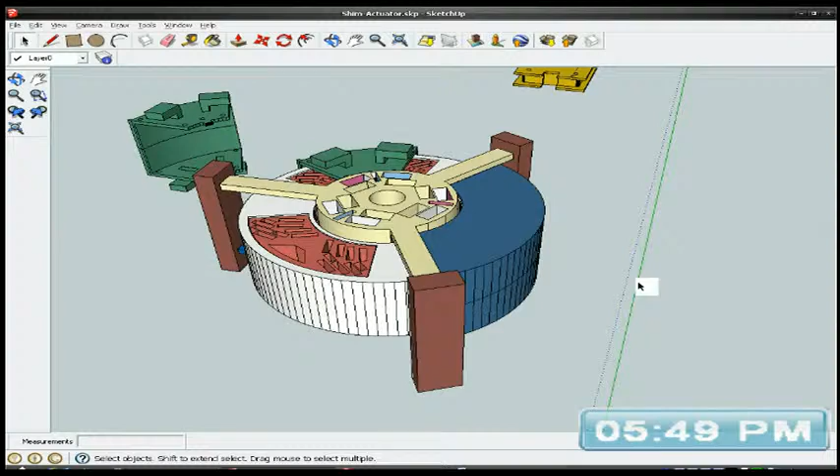I need to export them again now because I've changed it all. Edit component, export. Oh, that's the T canopy. Export. Where's the B one gone? B support canopies there. And these two get stuck together actually after I've printed them, so I just put some acetone on that join and they become one piece.

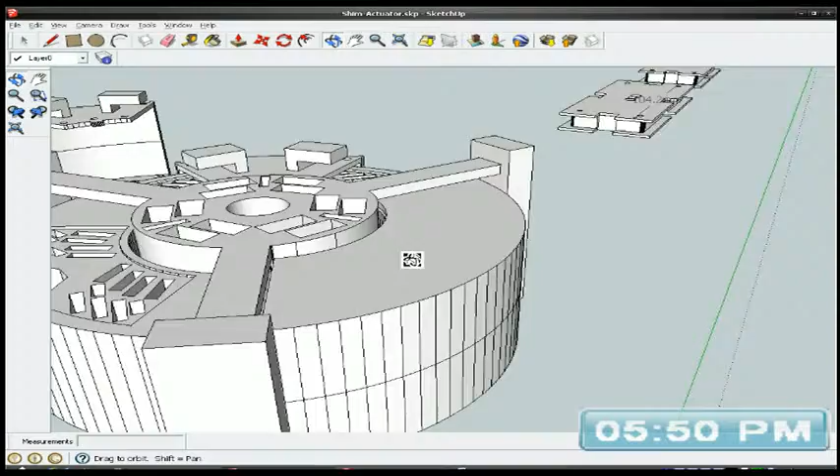We'll go back to black and white view in a minute. Looks a lot better when it's in black and white. You can just see everything a bit clearer. Edges show up better. Oh, I've got plenty of spacing around the edge there, which is cool. And let's see what the gap is. It's about, hang on, about 2.7mm space around the rim. Depends which direction my ruler's in. 2.3 actually, I think.

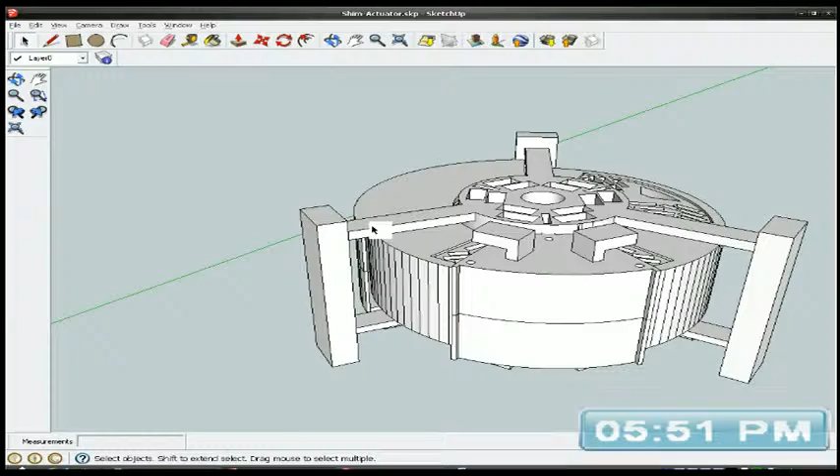I actually made that gap between the drum and the outside a little bit bigger than previously because I had some issues where it was catching on it. So what I can do with that middle bit is put some struts around, which I'm probably going to do to stop it from curling.

Like a raised rib going around this inside bit here where the coil will sit on top, because we don't actually generate any power there in this middle bit between here and there. It doesn't generate anything really. The coil's going along the rotational axis, so that's the place to put a raised edge to stiffen it up so it doesn't curl.

I can have a rib part in the middle, away from which will sit right in the middle of the coil, so that won't interfere. But I'm going to do that later. You'll see when I've done it. Because I have to put the holes in it like this one. I have to put these holes in.

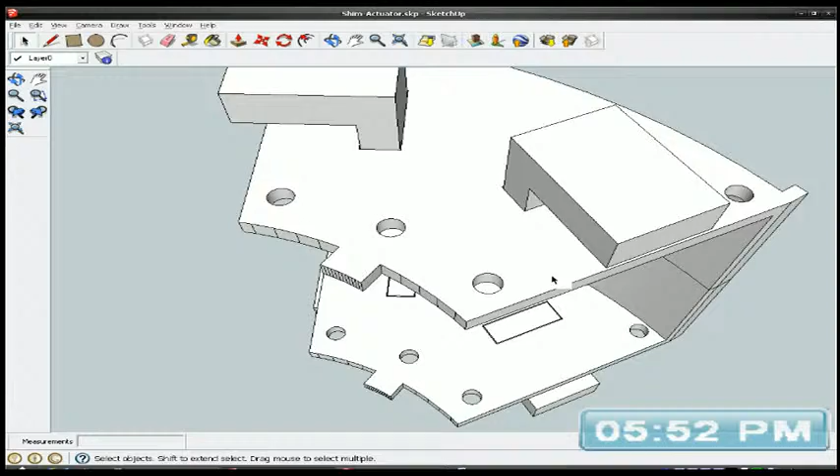These are to tie the coil on to it, and these brackets sit on. The brackets are going to be right near the edge actually. They're going to rest on top of these arms to keep this canopy centered so it doesn't sag and fall onto the drum. So I've got to put them in as well. It's just to keep the canopy centered relative to the drum.

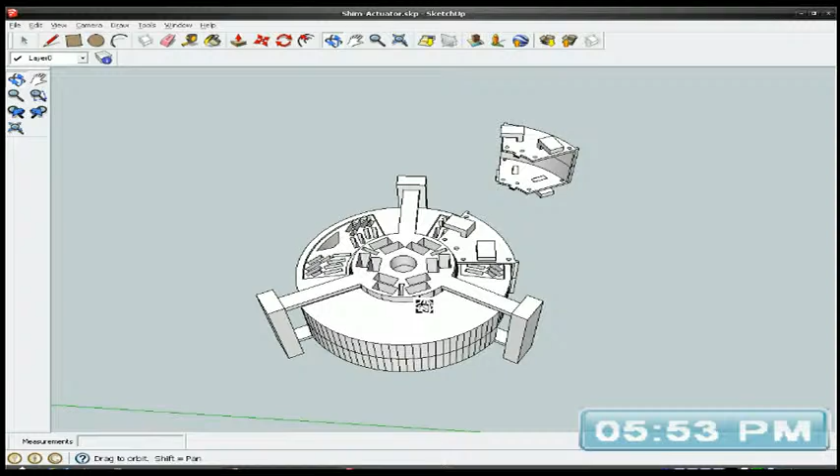Right, I'll save again. I think that's it now. I'm sure I'm still working. It looks like I am. Right. Yeah, I think that's going to work a lot better.

The coils themselves won't need to go right up close to these edges, because I just wanted more room to be able to have more coil, more turns, and so when I put the brackets on, they're going to be pretty close to these edges, and I'm probably going to have separate brackets or something for the coils to sit inside as well. So instead of just two of these little brackets, I'm probably going to have 4 on the top and 4 on the bottom. Some for the coil, because I want to wrap the coil directly onto this support

canopy. I want to wind it directly onto it instead of winding it separately, because I get much tighter winds on it, which means I've got to do it by hand, which is a bit of a drag, but it doesn't take too long to wind them really. There's trouble with winding it on a bobbin, and then you take it off the bobbin and then you've got to shape it around this canopy. The problem with that is you can't quite get it to sit right. It just doesn't quite sit right. You end up with gaps in places that you don't want gaps, and so it'd be better to just wind it directly onto it.

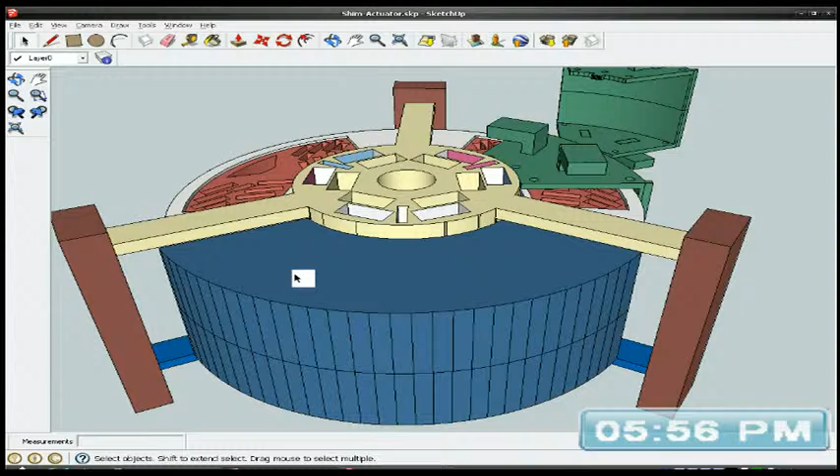Usually what happens with larger sizes, you get curls and warps in certain areas, and by looking at where it's curling, that will tell me where to put support ribs on here, like a raised edge that will stiffen it up. So it'll give me a bit of an idea where I need to put more stiffened plastic on it, because you cannot really tell until you've printed it.

The biggest problem I had before was on this back shell here, on the part that goes on the outside. It warped, so the middle part curled in and it was bow-legged. It was like bowed in, came in a bit like that. So what I did was I thickened these struts out, which are on the ends. That's another thing I can add. These little beams that go all the way down the corners prevent it from curling inwards. They give you a bit of support, so it stiffens this whole thing up. It's easy for me to put them on there.

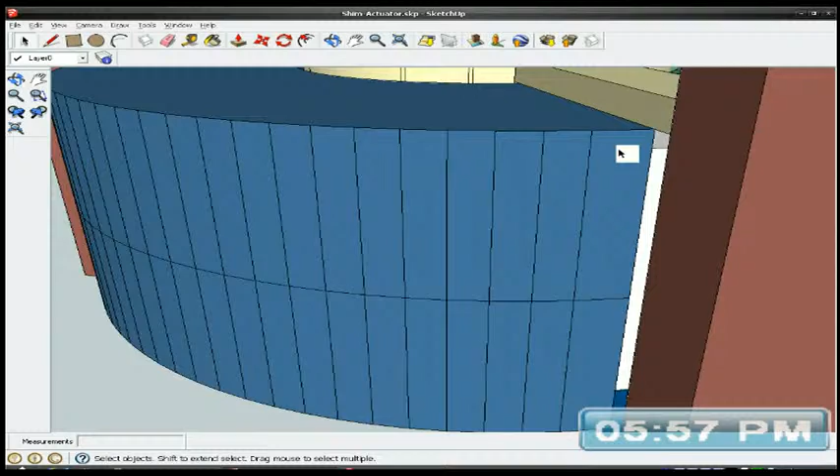All I have to do is put a cut line down this back edge here, right close, because I've got plenty of space. If you look, there's a really good space on these new ones now. So that's another thing I have to do: measure in about 5mm or something, then draw a cut line all the way down, and just extrude it out, and that will form a plastic beam going all the way down, which will meet up with the one on the bottom as well, and that will stop that from curling.

I could in theory put them in the middle as well, because the coil won't actually sit right in the middle. There'll be an air gap right there, because the coil will go sort of around here, so any areas where the coil isn't going to be, I can put some support struts in. So that's the next job to do.